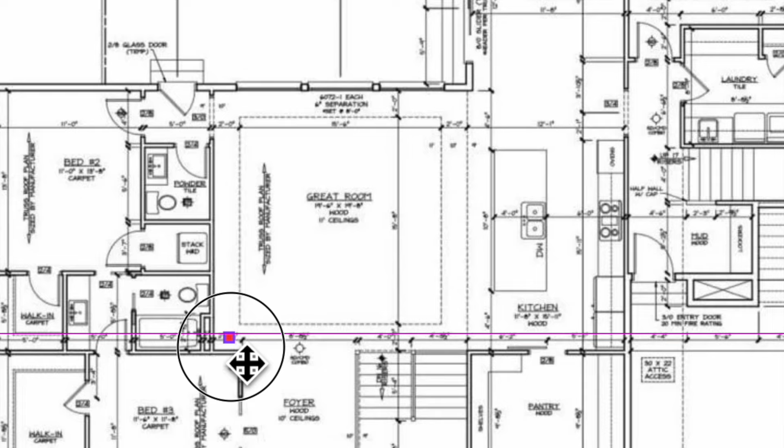Once you understand what you're looking at with the plans, and you have an idea of the flow and where furniture is going to be and the built-ins and that kind of stuff, then light the corners. In this great room, for instance, I can see this dotted line indicates some kind of a tray ceiling, so I want to be careful of that. I'm going to leave these recessed lights inside the tray.

Now these lights over here will cast light into the kitchen. But the first thing you want to do is light the corners. You can come back in and tweak these and move them around as needed, but that's step number one.

Light the corners—it pushes the walls out. It keeps recessed lights away from the blades of a fan. So I've lit the corners. You make it feel larger, it pushes the walls out, it highlights them. It shows you the very boundaries of the space, so it makes it bigger.

Same thing with your exterior. If you have lights around the perimeter of your fence, it stakes out your property—it's like when your dog stakes out the territory. You mark where the edges are, and so it lets everyone see how big the room actually is. It also provides ambient light to generally light the room.

How are you going to use the space? Look at the plans and think about where you're going to work. Where am I going to chop vegetables? Where am I going to mix up stuff? Where am I going to do my writing? If you identify those places where you need task lights, then you're on number two.

When we look at this kitchen, we want to think about where we're going to work. We've got this big island with lots of countertop space, so I'm figuring a lot of the work's going to go on over here and on either side of this cooktop. Maybe double fridges here, and that's the ovens. So I'm thinking there's going to be a lot of work going on these countertops.

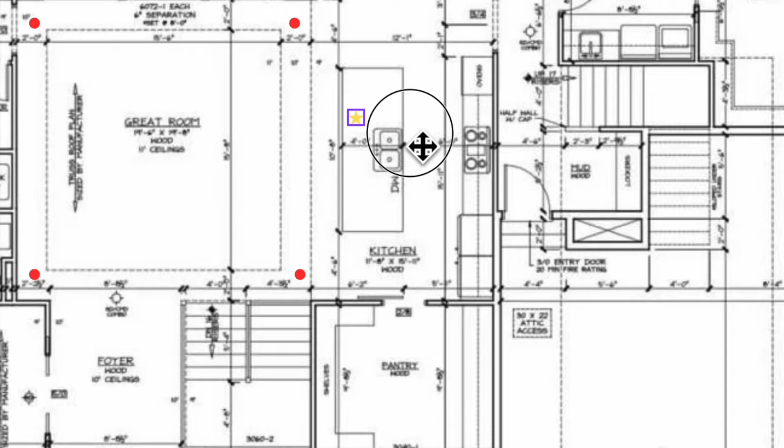You get the idea. On the island, probably they're going to have some pendants, so let's add those pendants in so we know that there's going to be some other light there before we start dropping in the recessed cans. And then we can add them in.

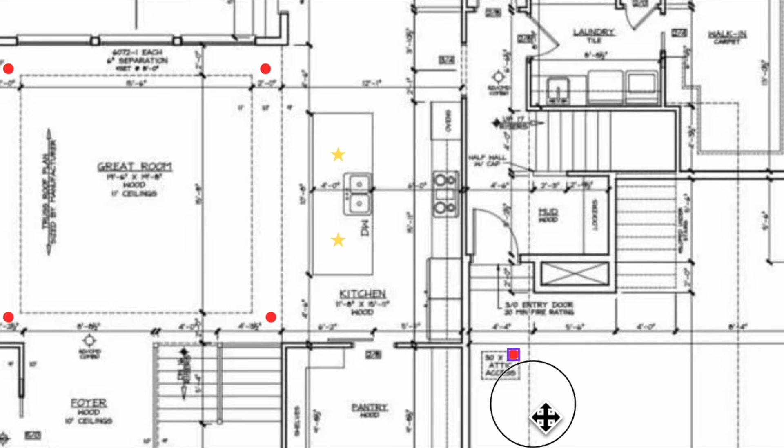So once I've figured where my pendants are going to go—my jewelry in the kitchen—I want to start laying out where I'm going to work. I'm probably going to work right at the sink, I want some light. I'm also going to want some light on this countertop over here on the other side of the range. I want to match that because we love symmetry. Where else in this kitchen am I going to work?

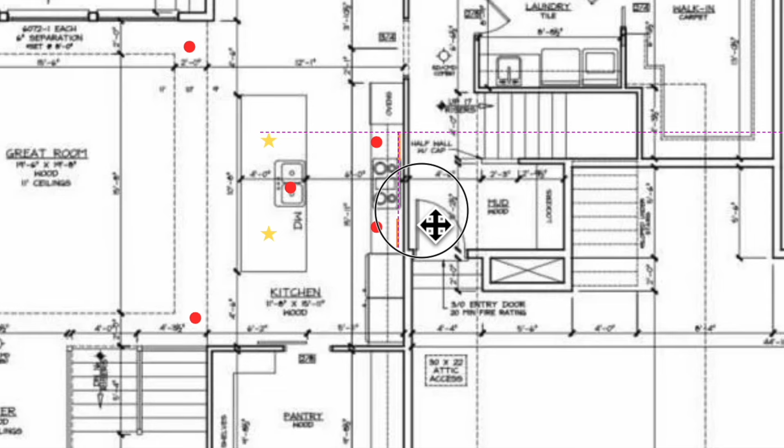In addition to the recessed lights, we add some under-counter lights here and over here. Now we've got plenty of task light. Between these pendants—when you are hanging these pendants, make sure that you hang them at a height where people are, so 30 to 36 inches above the countertop.

Technically, this should be first, and that is fixtures. Choose the fixtures that you're going to use in the space first, because they're the jewelry, they're the sparkle, they're the things that we want people to see—not glowing, glare-ridden discs of wafer junk in your ceiling.

We want to see the jewelry, the sparkle, the ambient light or the task light that fixtures are going to give. So once we place them, then we know what we're left with for the recessed lighting.

Just a little tip on these fixtures. I know I've said it before, but 30 to 36 inches above countertops for pendants, for chandeliers over dining room tables. And if you've got a big vaulted ceiling or a cathedral ceiling, don't put those pendant lights way up there, they still need to be generally in the area where people are. So 8 to 10 feet if you have a 12 to 16 foot ceiling, depending on the fixture you choose. Choose appropriately. You want tall people to feel comfortable underneath it, but you don't want it floating up at the top of the rafter and not have the light cast light up and down and all around.

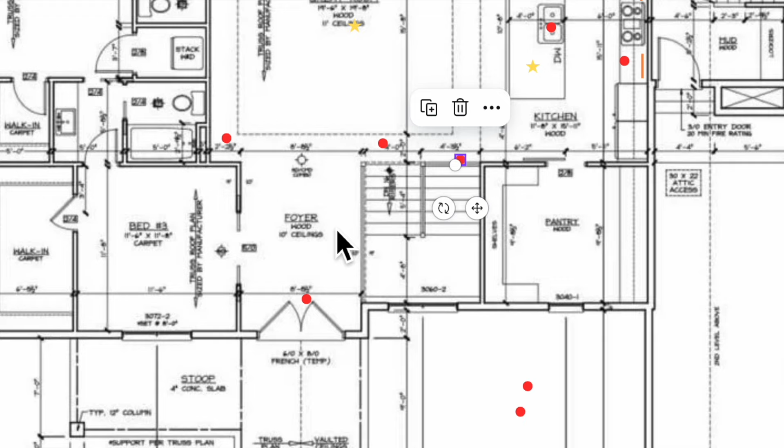So when you come to the stairs, you can light the path up and turn the stair lights off. And when you're going down, you can light the path and turn the stair lights off when you get downstairs. We've also got a back door over here, so we want to light that doorway so that we can see when we come into the room, when we come in from outdoors. You want to make sure that you light high traffic, high flow areas.

And that brings us to the next one. Once you've got the first part of your safety in place, you want to think about the second one, and that is lighting the path. So from the front door to the next switch, that's what you want to think about. How do I flip this switch and have a lighted path to the next switch? When you can move through the house with switches as you go, then you've done it right.

You want to make sure that you can see down the hallway at night, that you can see out the path to the back door. So you want to make sure you can get from the front door to the next switch in the kitchen, or from the kitchen to the next switch in the dining room, and be able to turn those lights off as you go. Don't forget about the outside.

When you're thinking about your safety and your path lighting, think about the exterior as well. So you want to light up your gates. You want to light up walkways, driveways, front entrances, back doors, the shed, whatever it might be outside. Treat it the same as the interior. You want to have lighting, you want to have layers of lighting. So you don't want all of the light coming from spotlights off the garage. You may want some path lighting as well. Treat your exterior the same as you would an interior space, and it'll be beautiful.

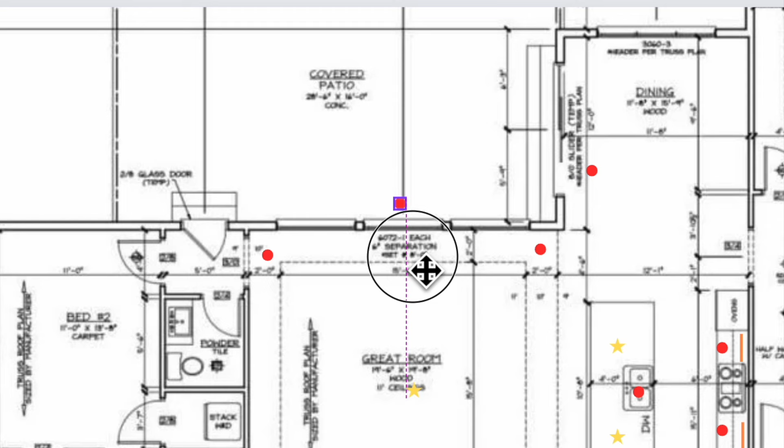So when you're placing your exterior lights, for instance, in this case, instead of putting them here, maybe in the eaves, I would put them here and here, so that you minimize the glare that's coming in these windows here. When you can, make sure you push those lights away. Keep them off the glass at least 18 to 24 inches. If you have a big wall of windows, just light the curtains in the corners.

I saved this one for Lucky 7 because it's really important. Once you get your plan all set up, you think you've got it going, check against your elevations.

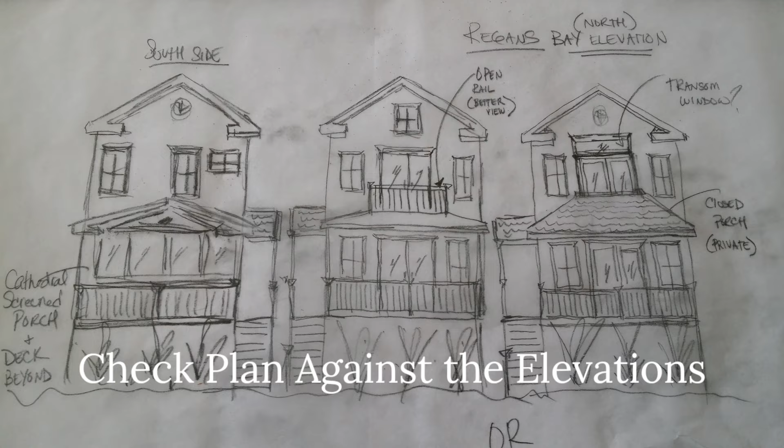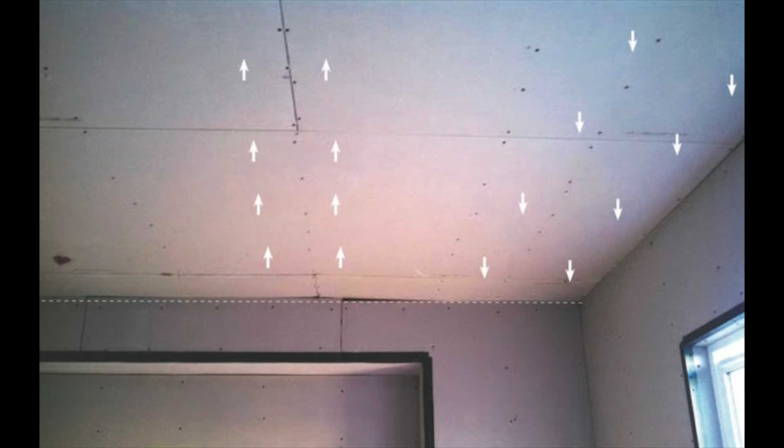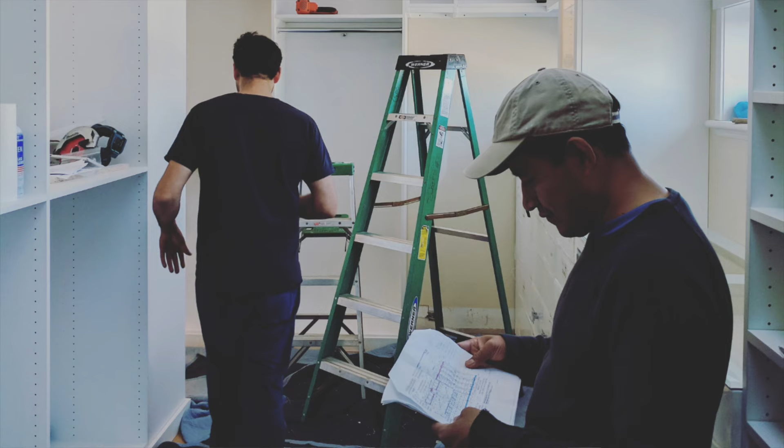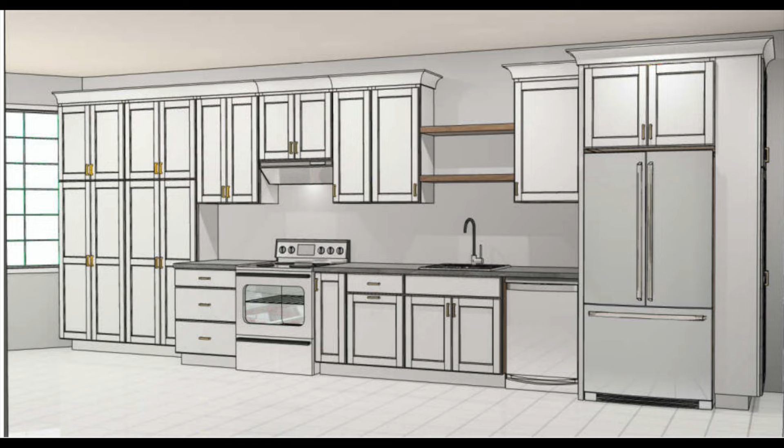We'll lay out this plan looking at it from a bird's eye view. But when you're standing and you have a full height cabinet, you might have to move those lights out. Or when you have beams in the way, obstructions, ductwork, check the elevations against where you place the lights. Sometimes it looks pretty good on a plan, and then when you look at the elevations, especially with cabinetry or shelving, you might want to tweak it. Compare your plans with the lights on it to what the elevation, the vertical view, will be, because it's very telling. Sometimes you'll see it's going to be in front of a window, a full-depth cabinet, or built-ins. You may want to add lighting because there was a special feature. So make sure you look at your elevations.

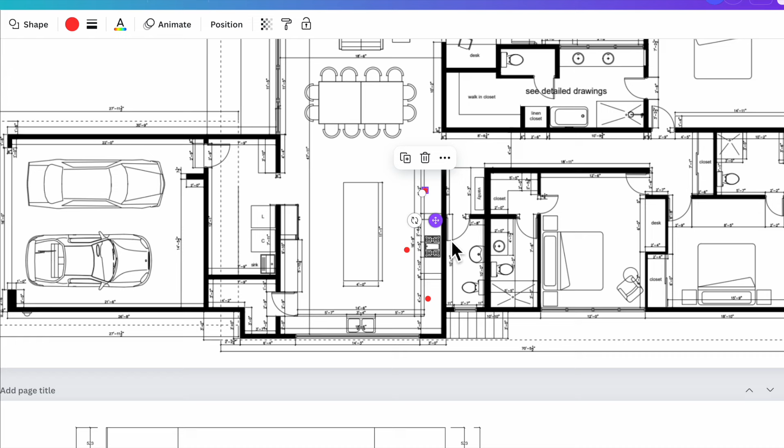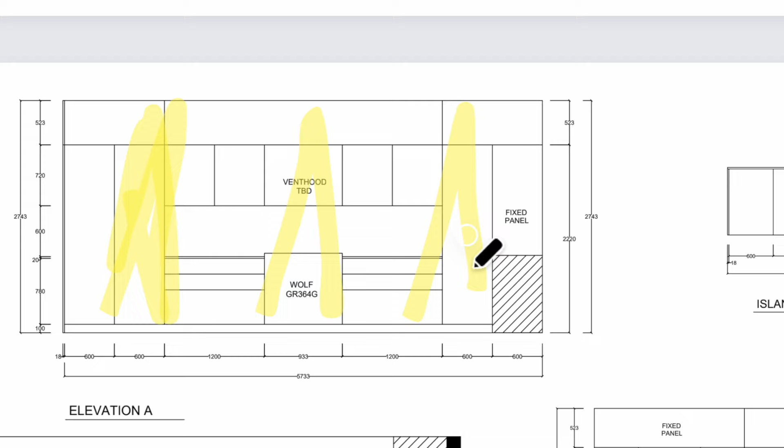Let's say we drop one here. We grab another one, put another one here. And we start laying them out. What we need to do is compare them to the elevations of this kitchen. And I realize that I've got a light in front of this hood, so we've got some glow coming here, and then I've got one in this corner, and this one over here over this countertop. But what I realize when I look at these is this is a full height cabinet, and this looks like it's a full height cabinet here too. So if I'm putting these lights back there, that's not going to work. When you lay out your lights on the plan, make sure that you check them against the elevations.

Look at your elevation. Color matters. So when you are doing your lighting plan and laying out all these beautiful lights and recessed cans, make sure they match. Decide what color you like, decide what colors are appropriate for the rooms they're going in, and keep them all the same. If your chandelier is 3,500 Kelvin, don't get 5,000 Kelvin for your kitchen. They don't match, it's very disconcerting. Pick the colors that you like.

For instance, I got a little treat for you here. Go to the lighting store and see what kind of temperature you prefer. Is it 2,700? Is it 3,000? Is it 3,500? Is it 4,000? You see the difference in color. So go to a lighting store. 2,700 is much more flattering. Go to a lighting store.

Color matters, so check the temperature of the spaces that you're lighting. Check the cabinetry, the floor colors, your countertop colors, your paint colors, because the color temperature you choose, whether it's 2,700, 3,000, 3,500, 4,000, or 5,000 Kelvin, you see the difference. It's changing everything around me. So you have to decide, do you want it to be warm at 2,700, or do you want it to be sterile and bright at 5,000 Kelvin?

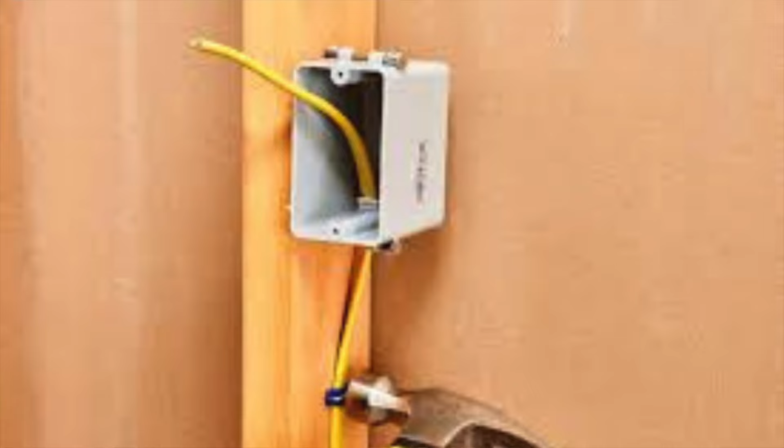The riches are in the switches. Make sure how you're going to control each light, and which lights are going to be controlled together. Go through the space in your mind and think: do I want to turn the corners on at the same time? Do I want the pendants to come on separately from the perimeter lights in the kitchen? Think about how you want to be able to use the lights.

Like in here, I've got the 4 corner lights and a center light, and my dopey electrician put them all on the same switch. So I can't control the center light separately from the crappy wafers in the corner. It's on the to-do list of things to fix.

But be mindful of that. You want to know how you're going to control it, where you're going to control it from. So when I walk in the room, how do I flip on a switch? How do I get to the next switch to light my path? How do I turn on the lights behind me when I'm going to bed at night? So you want to make sure you know where your 3-way switch is.

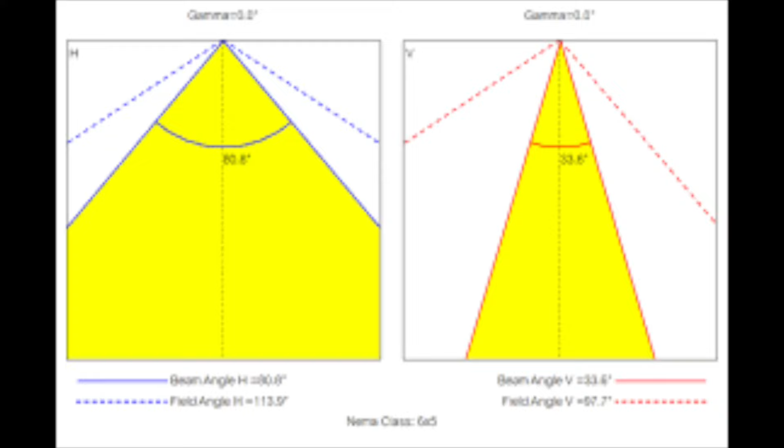Number 9 is mighty fine, and that is to check the specs of the fixtures that you chose. If I choose a beam spread that's really tight, I might need more lights. If I choose less lumens, I might need more lights. If I choose a wider beam spread, I might want to space them a bit further apart because it's going to be wider. How bright is the light? The specifications of the light are going to dictate how far apart it needs to be. We can get ahead of ourselves thinking that I've got to do the plan.

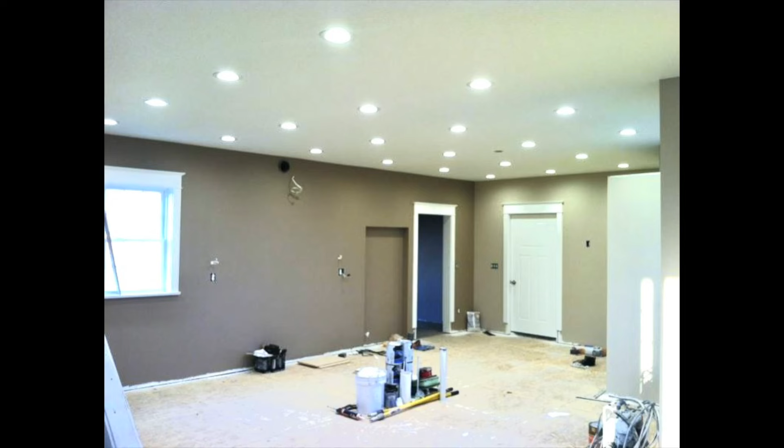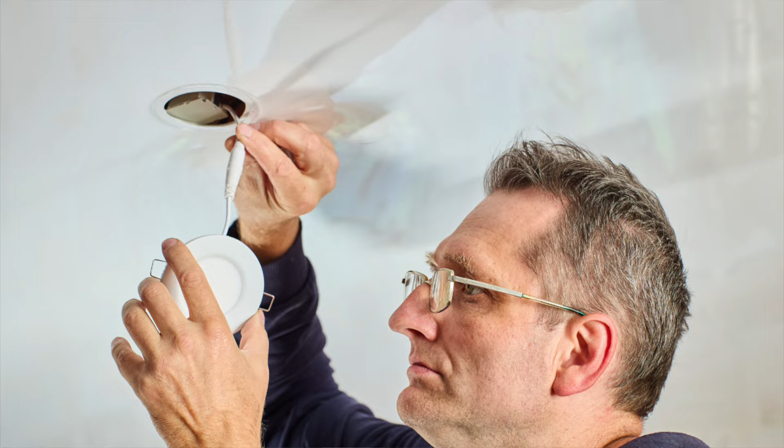So check the specs, see what's in the allowances, and see if you can work with it, because there's a lot of really good lights out there that are fairly affordable. You want to check the specs. You want to make that detailed and clear in your contract. A recessed can is not a wafer light. A wafer light is a surface mount, cheap light that often, when an electrician is trying to keep his bid lower and get a job, will throw those in. That's not what you want.

A recessed light is different than a surface mount light. So if you want surface mount wafer lights, go on with your bad self. If you want a recessed can, make sure that the bid is specific and it's detailing exactly the kind of light, or within limits, a 4-inch recessed can with an adjustable gimbal. Be specific. You want to get the right tool for the right thing.

And when it comes to recessed lights, think about them like a fixture. I mean, if I go to Target and I buy a cheap light, I know what the expectation is for that light. I know what I expect for the lifespan, what I expect for showing it off, what it will do for me. A recessed light is a fixture. So don't treat it like a light from Target or Walmart or that you order on Amazon. This is your chandelier. This is lots of little chandeliers all around your house. So be particular. They make all the difference in making the rest of your house look beautiful.

You're almost there. What do you do now? This is the biggie. If you forget this, you're screwed. This is the walkthrough. Go through with your plans and walk through the space. Mark with chalk, blue tape, whatever it takes, and lay out those lights.

See if they make sense in the space. Are they far enough apart? Is there a beam in the way? Is there ductwork here? Oh boy, we're going to move the stove. It's not going to go there. We're going to move this. Changes happen all the time.

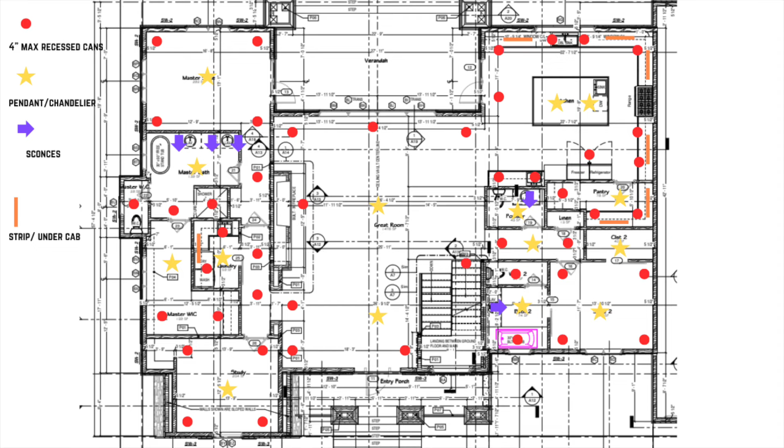So walk through the space with the electrician. Walk through it again. Walk through it when he's not there. Make notes. Make sense of it. Make changes. Get the best design you can.

Hopefully these 10 generic things will help you to get a better lighting plan. And I pretty much can guarantee that, because the lighting plans I see show no effort at all.